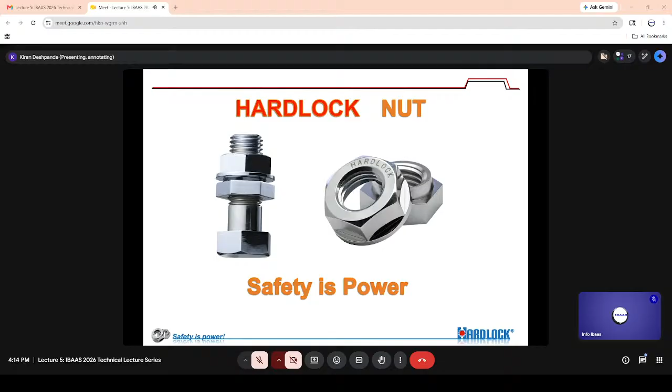HardLock nut is a very unique technology. It is patented and developed in Japan, and what they are offering to the industry is safety is the power. So with this first slide, I would like to run through a very small video, and this video will tell you everything about HardLock. Then we can go through various applications.

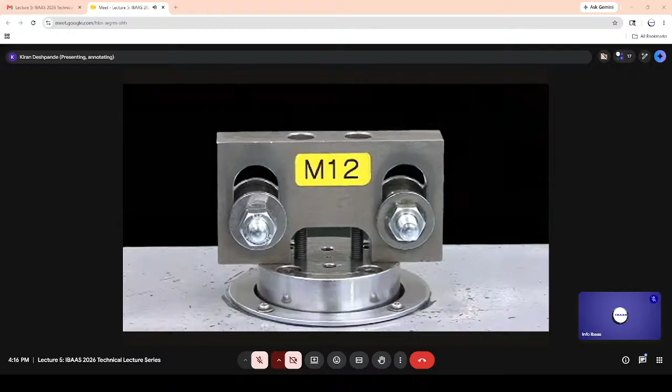Allow me to introduce you to the HardLock nut. Our powerful, original, self-locking nut keeps any application it is adopted in safe and secure all over the world. One of the world's fastest and safest high-speed trains, the Japanese bullet train Shinkansen, is supported by the powerful self-locking effect of the HardLock nut. The train and railway tracks are exposed to vibration and impact beyond imagination. The HardLock nut is the only self-locking nut which can withstand such severe vibration and impact. Now, let us see how the HardLock nut compares to other nuts in vibration tests. This test equipment generates extremely tough vibrations and impact in accordance with National Aerospace Standards NAS 3350 and 3354. The nuts are marked prior to testing.

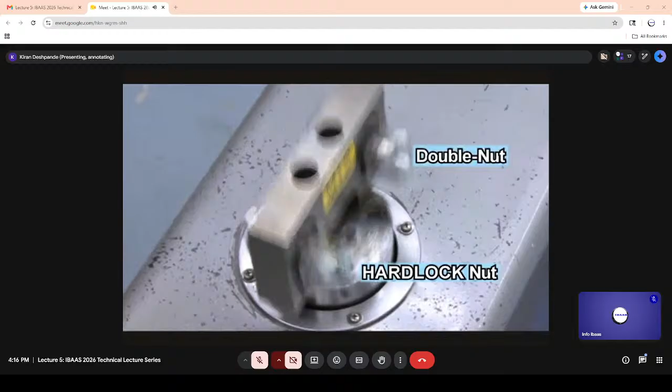By looking at the markings, you can see that the condition of the HardLock nut remains unchanged. These are the results of the vibration test.

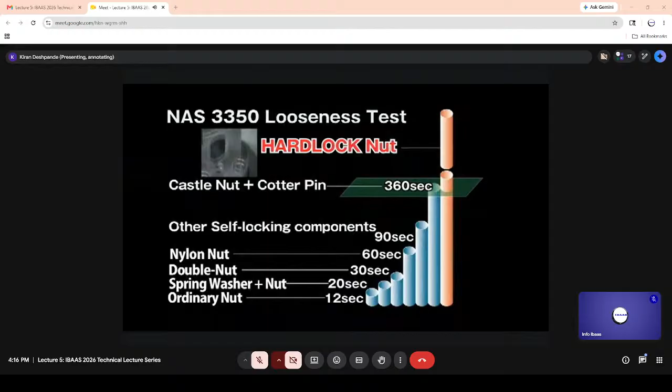The single nut flew off after 12 seconds, and the double nuts after 30. But the HardLock nut did not loosen at all, even after the maximum 30,000 test cycles and 17 minutes of vibration exposure.

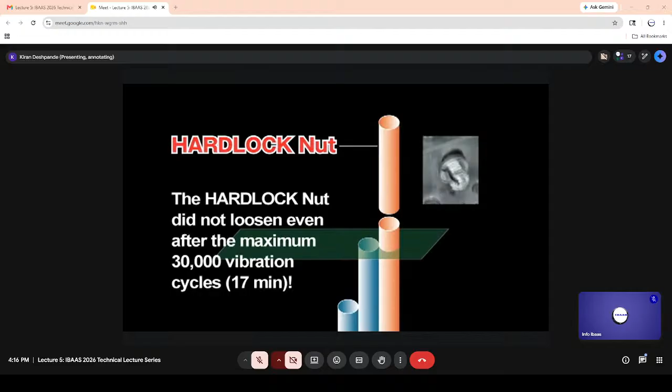This is a transverse Junker machine. It couples a bolt to a fixed plate and glider plate and moves the vibration plate transverse to the bolt shaft and measures any change in the clamp load.

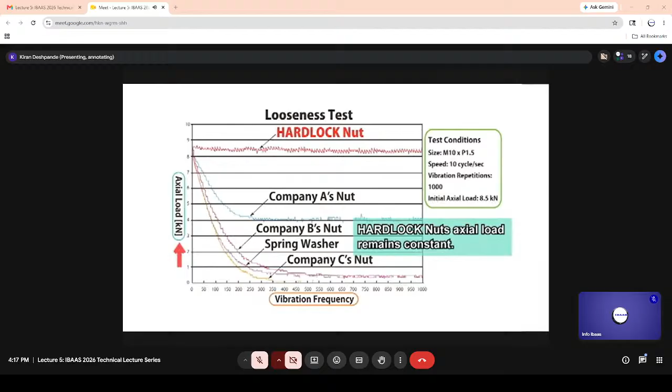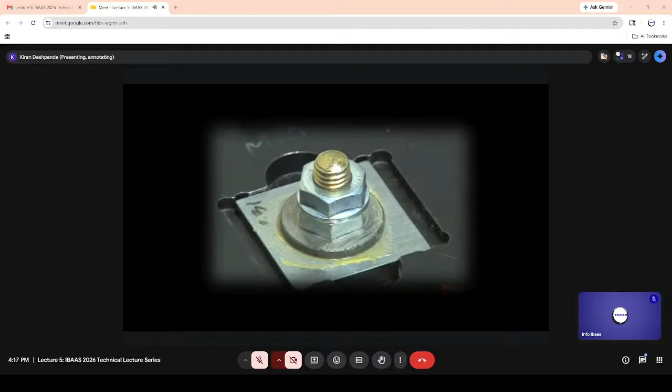These severe tests have proven that the HardLock nut can withstand vibrations and impacts not only in the axial direction, but also from the direction perpendicular to the axis. The latter direction is considered to be the predominant cause for loosening bolted joints.

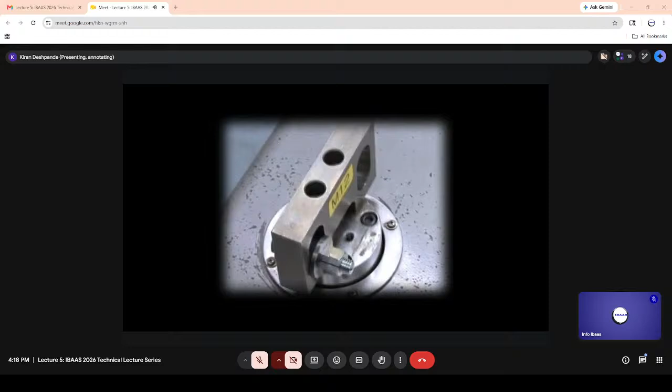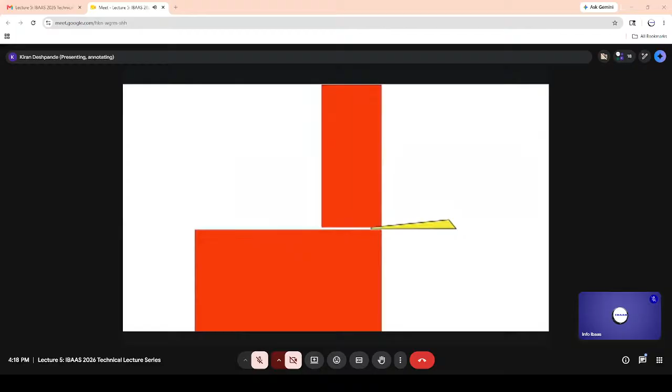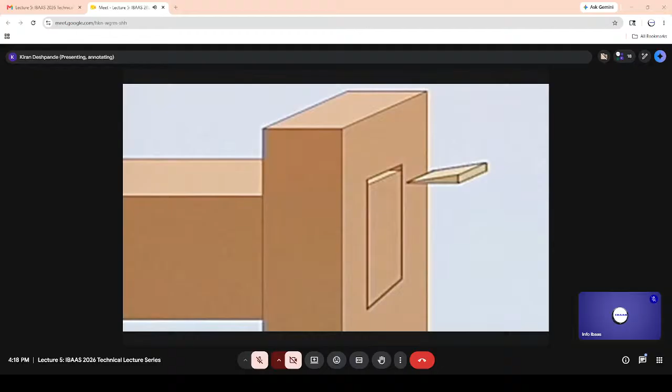The HardLock nut works by utilizing the wedge effect. Wedges are used in places like the torii arches of a Shinto shrine to firmly hold two pieces together. Hammering a wedge between the nut and bolt completely fastens the two. But this is hardly practical when you consider workability.

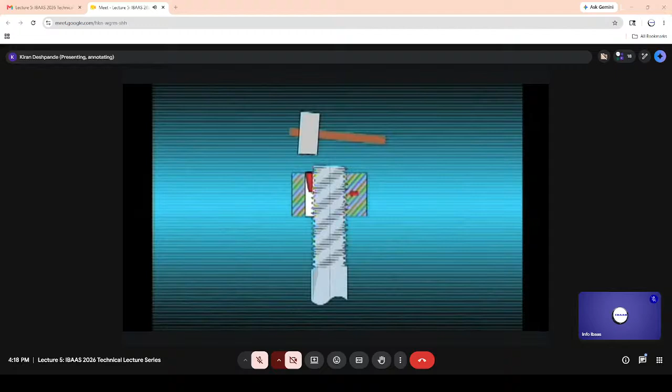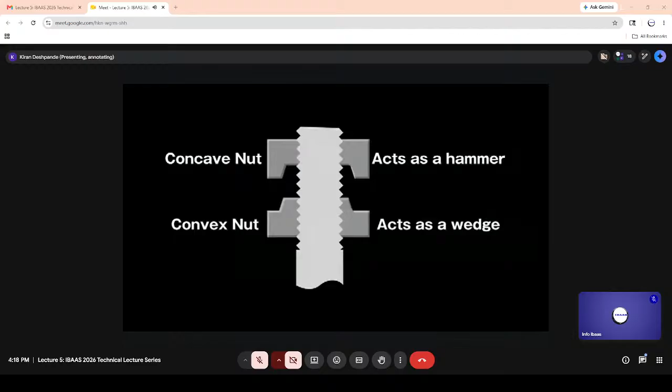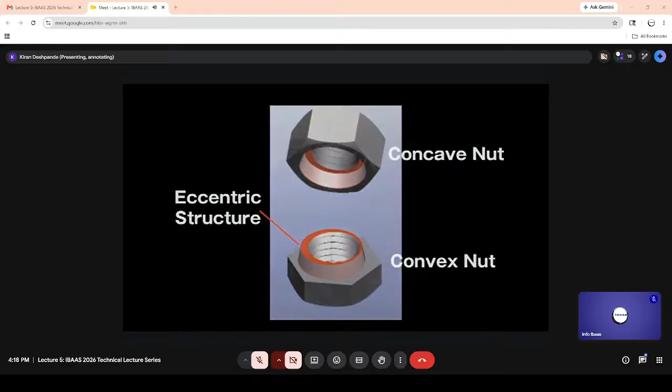So we divided the nut in two, whereby the convex nut acts as the wedge and the concave nut functions as the hammer. The convex nut is fabricated as a wedge by an eccentric structure that is slightly off-center. This wedge screws in between the concave nut and the bolt to produce a powerful anti-loosening effect. In other words, the convex nut acts like a wedge because it is off-center, and the concave nut functions like a hammer as it is screwed in.

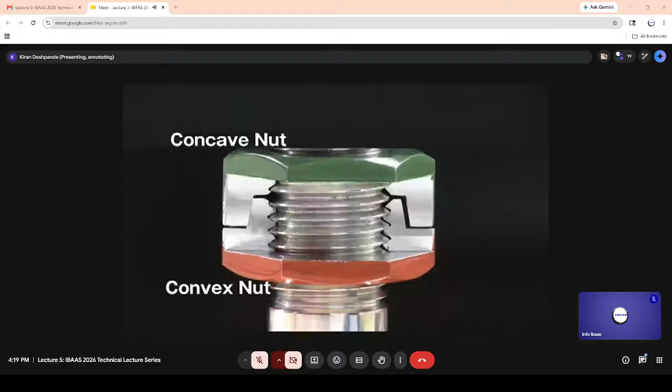The HardLock nut began garnering worldwide attention when a research paper was submitted to a gathering of the American Society of Mechanical Engineers held in Denver, Colorado in July 2005. The paper scientifically proved that the HardLock nut never loosens because of its structure.

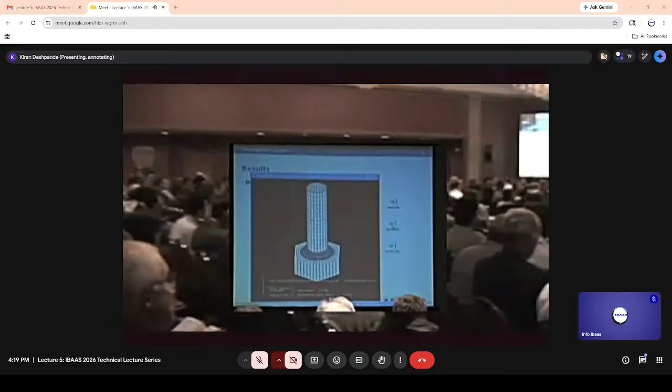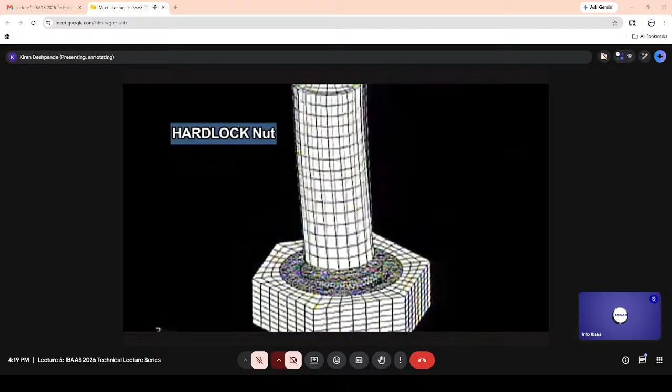When a strong impact is applied to a bolt shaft in the transverse direction, an ordinary nut slowly turns in reverse. This shows the nut loosening under vibrations. With the HardLock nut, though some movement to the left and right occurs, you can see that the nut does not turn in reverse. This is the secret behind the world's highest anti-loosening performance that keeps the nut from loosening under any kind of impact.

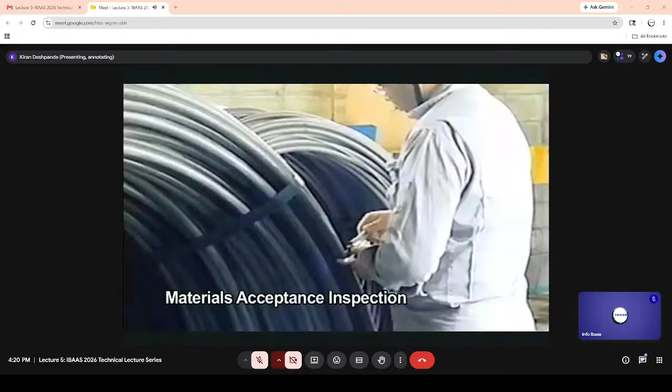The HardLock nut is often adopted in applications where loosening will cause a potential risk to both people and application. Therefore, we are particularly committed to quality control and frequently perform various quality inspections.

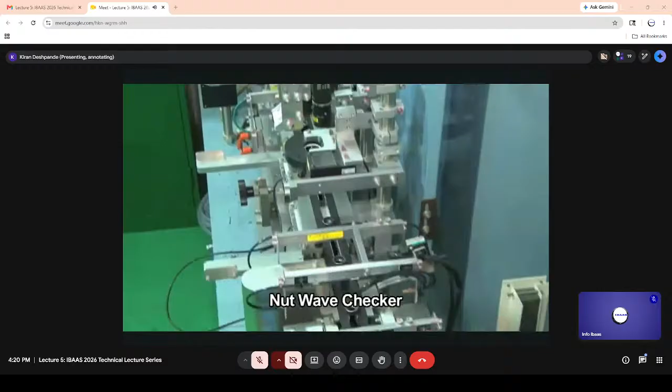This machine measures the dimensions of a nut in 6 places at the same time. This is a nut fastening tester, and this is a high-definition digital projector. Besides this equipment, a variety of inspections are repeated to ensure durability, workability, and fastening and removal.

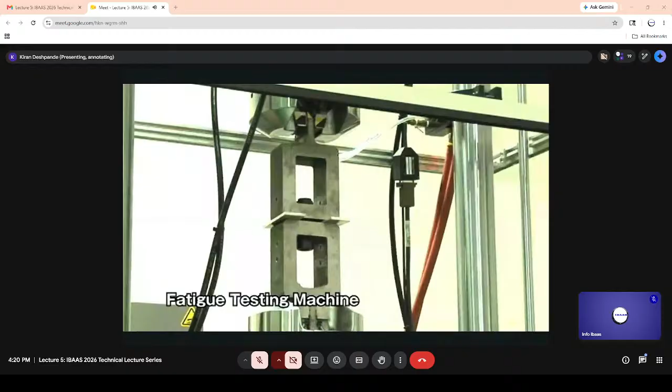Once the HardLock nut has been installed, it will not run loose, so performing frequent maintenance work is not necessary. Therefore, costs related to maintenance can be reduced immensely by utilizing the HardLock nut.

Let's take a look where the HardLock nut is utilized. First, the railway industry. The primary requirement of nuts used with railroads is that they never loosen. Loose nuts can lead to serious accidents.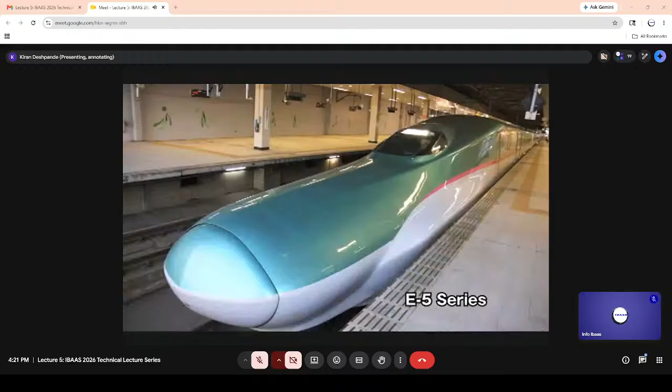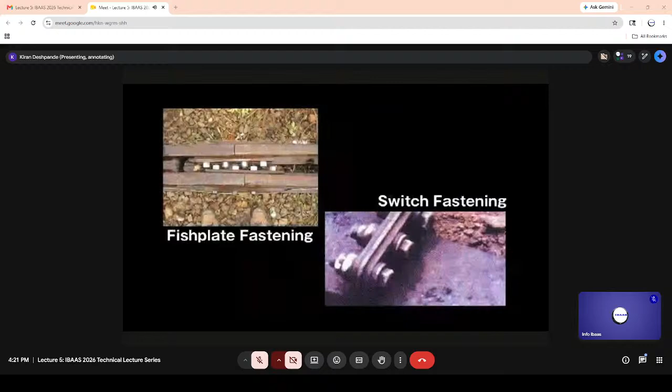In Japan, the HardLock nut is used at stations and inside walls and other locations of the famed Shinkansen and many other lines to ensure safety. In the UK, the HardLock nut has been officially adopted by Network Rail since 2003, replacing a majority of the fasteners for trains, tracks, switches and overhead wires, and at stations.

The HardLock nut has been adopted in the Taiwan High-Speed Rail. It was also officially approved by Queensland Rail of Australia and has been utilized in many locations.

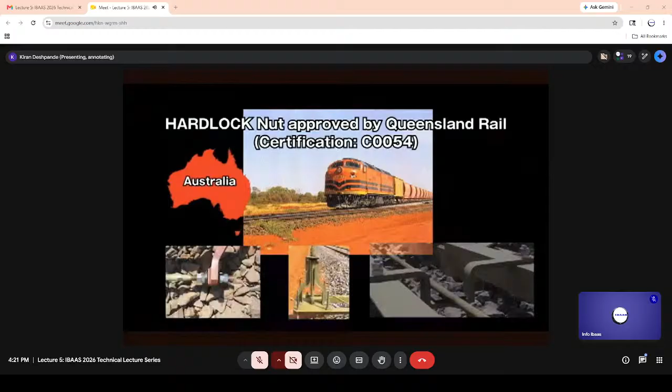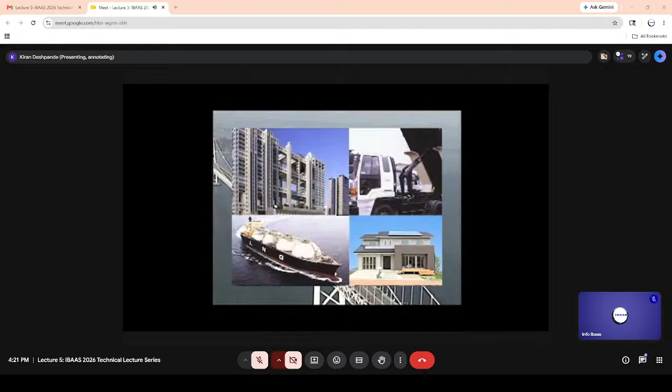Japan is a country with many earthquakes. If a bolted joint were to loosen, the consequences could be catastrophic. The HardLock nut is adopted in a wide variety of applications, both domestically and internationally, including highways and bridges, skyscrapers, huge facilities, power plants, steelworks, and earthquake-resistant homes.

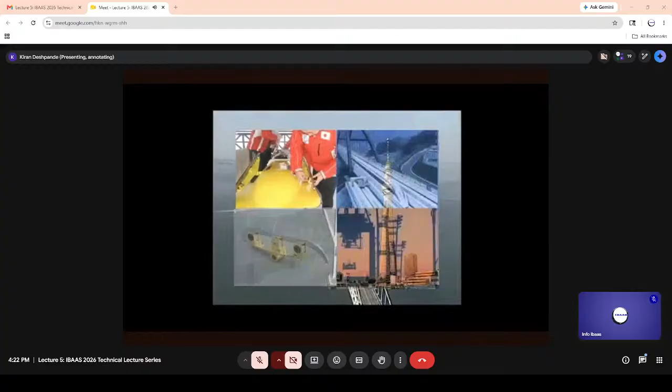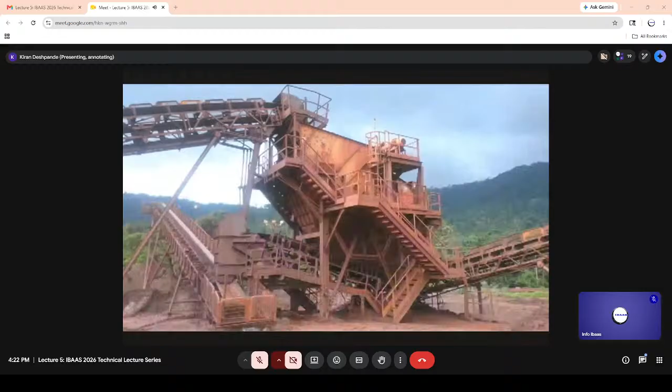Recently, the HardLock nut has been adopted by Vale SA in Brazil, the world's largest producer and seller of iron ore, in various heavy machinery and equipment, and has received an extraordinary evaluation for its remarkable loosening prevention performance, contributing to improvement in safety and extensive reduction in maintenance costs.

And finally, let me introduce you to the HardLock family. This is the HardLock rim. It has a stopper for tooling on the concave nut to improve workability.

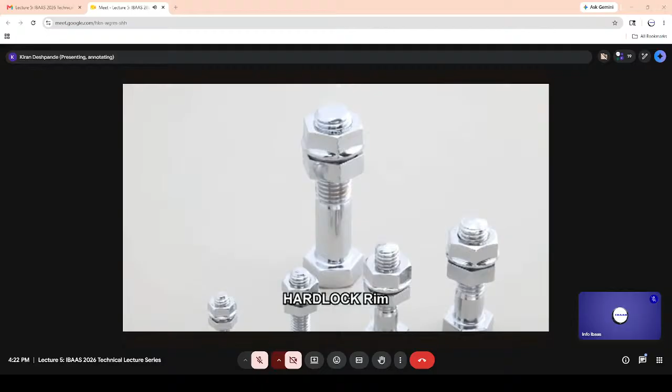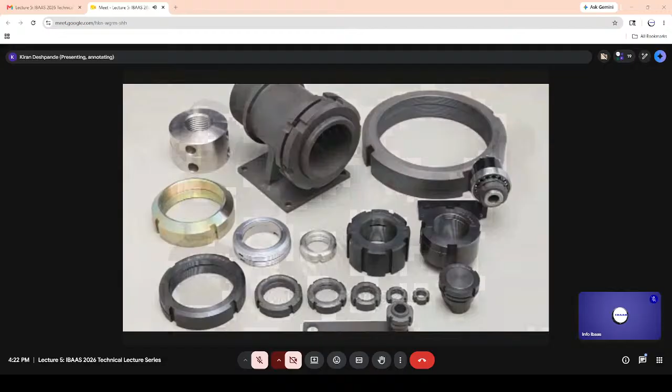This is the HardLock bearing nut. It is used in a wide range of industrial machinery to lock bearings and prevent loosening. This is the HardLock set screw, which revolutionized mold clamping in the automotive industry. HardLock industry always works towards improvement when developing new products.

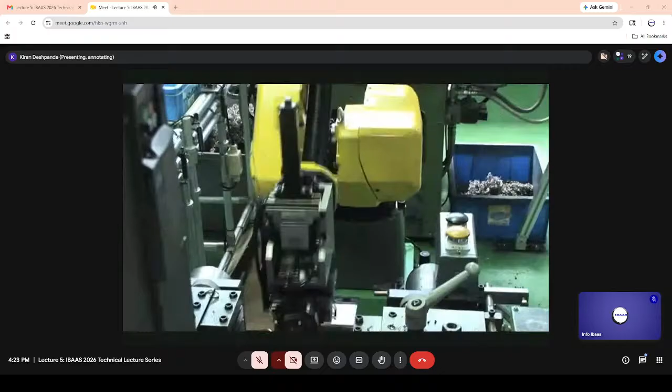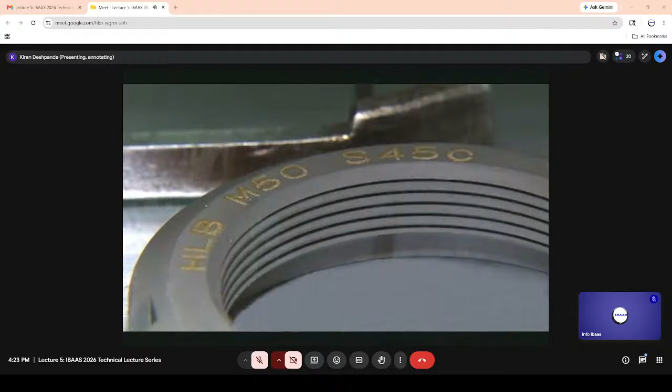What started in Japan has spread around the world. The products of HardLock industry are fast at work in places you do not see, within the foundations of society. Since our founding, everyone at HardLock industry, no matter what process they are involved with, has been forever passionate about safety in order to ensure world-class quality, making products that are guaranteed safe in any environment. Safety is power. Safety is HardLock.

So I have got help from Mr. Avadut for preparing these slides. This slide speaks about Mr. Wakabayashi. Driven by the desire to create truly reliable locking solutions, Mr. Wakabayashi founded HardLock industry over 50 years ago after identifying flaws in existing locking designs.

This concept was inspired by the traditional Japanese torii, a symbolic structure seen at Japanese shrines.

As explained in the video, the nut is divided into two parts: the convex and the concave. The convex nut has an eccentric protrusion, and the concave part has a concentric recess. When you tighten both nuts together, the concave part acts like a hammer, and it's like a wedging technology. The eccentric protrusion acts like a wedge. This creates a very high level of friction, and a very high level of locking power, which is very unique in the world.

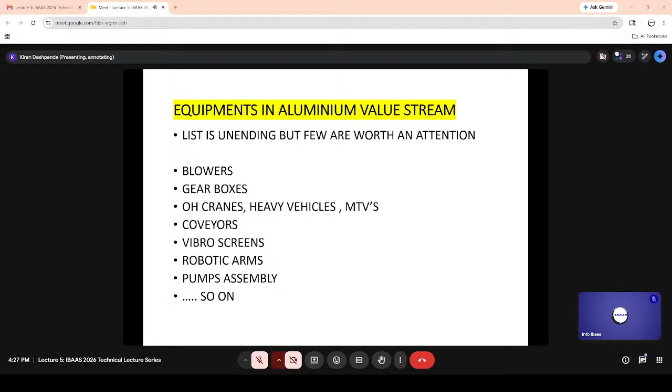Mr. Avadut Desai gave me some applications in different industries. In food and beverage applications, it is used in this particular application: an M24 HardLock nut used on the cone valve of an IBC tank handling powders and granules, ensuring secure fastening and preventing loosening during operations.

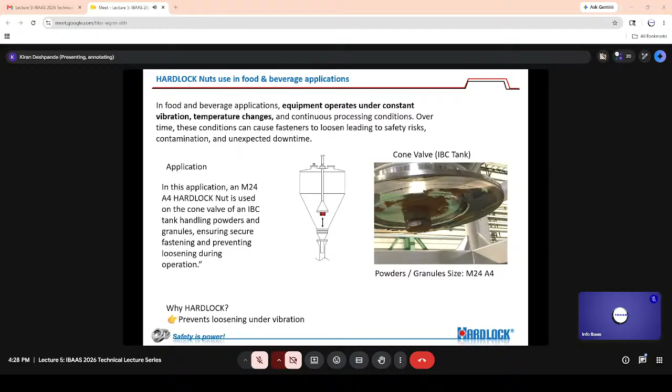In wine production tanks, HardLock nuts are used in multiple areas such as handrails, internal filters, and conveyor systems to ensure fastening where welding is not possible and to prevent loosening caused by vibration and continuous operation. Why HardLock nuts? Because the tank wall is too thin for welding, so bolted fastening is required, and HardLock ensures the joint remains secured without loosening.

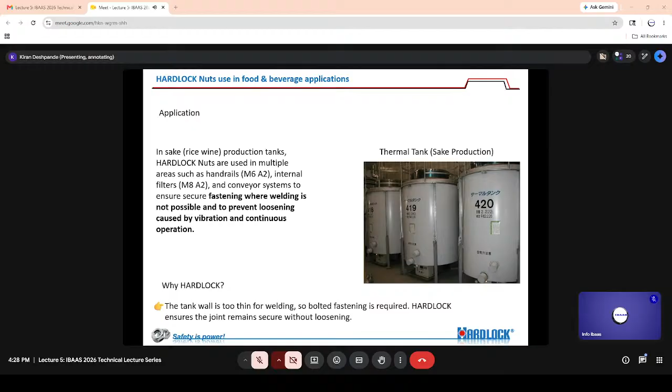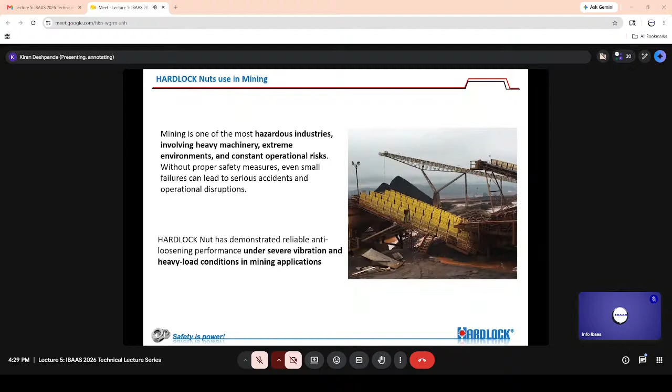In the mining industries, mining is one of the most hazardous industries, involving heavy machinery, extreme environments, and constant operational risk. Without proper safety measures, even a small failure can lead to serious accidents and operational disruption. HardLock nuts have demonstrated reliable anti-loosening performance under severe vibrations and heavy load conditions in mining applications. These are some photographs where you can see these HardLock nuts preventing the loosening of the surfaces.

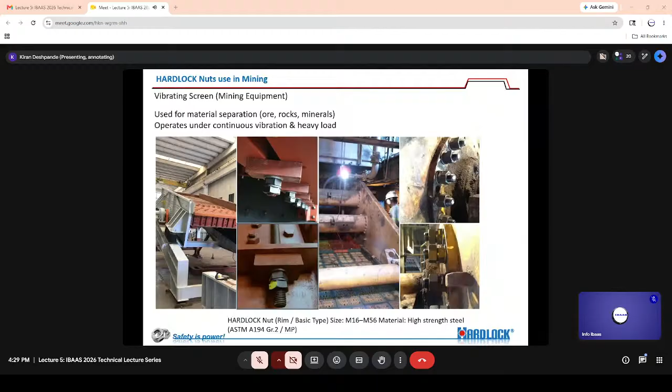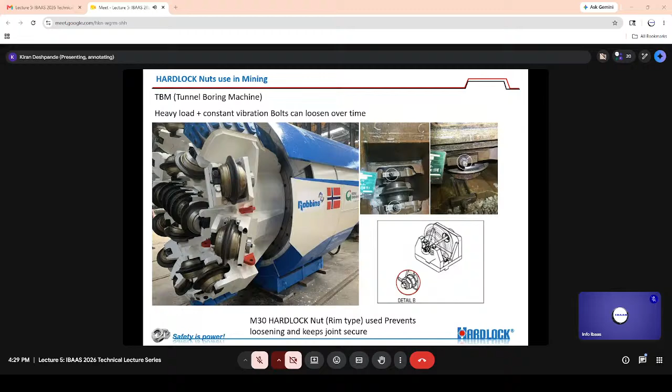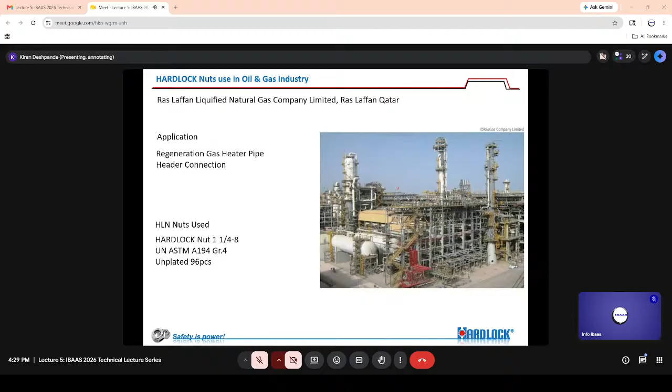To prevent this, HardLock nuts is a most remarkably adaptable solution, and it is most reliable. There is no comparison to HardLock nut.

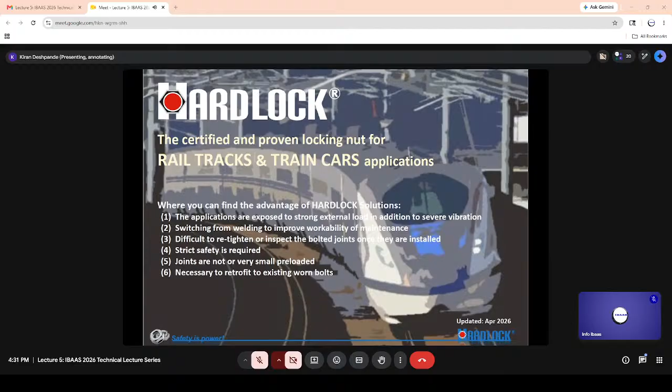Now these locking nuts are all maintenance free. You can unlock and again put it into the locking position. You never have to go again and again and check the tightening, because once you lock the nut, it will remain as it is.

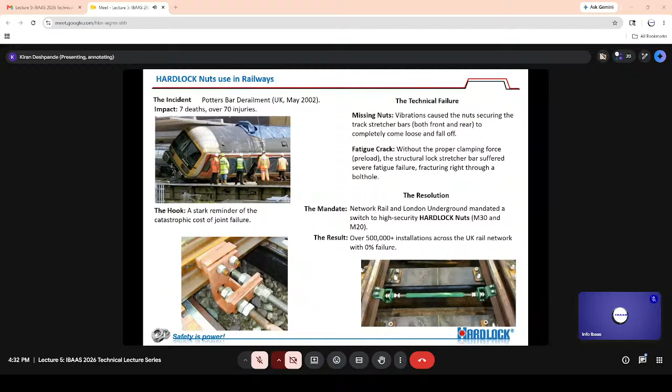So this presentation today is that this particular concept can be taken to the aluminum industry. That's why currently, through my friends in India, we are explaining this concept to Hindalco, and they are likely to adopt HardLock nuts at various applications.

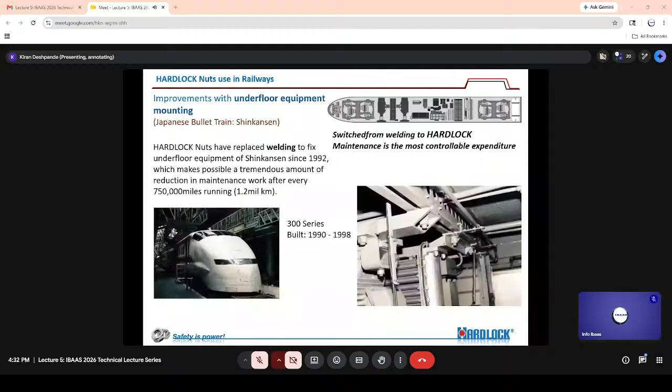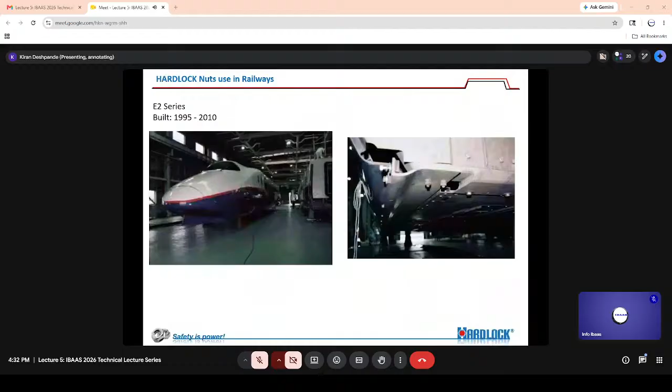So these photographs show the various applications of HardLock nut providing safety, and many of the applications all over the world have realized that this is going to be the ultimate solution.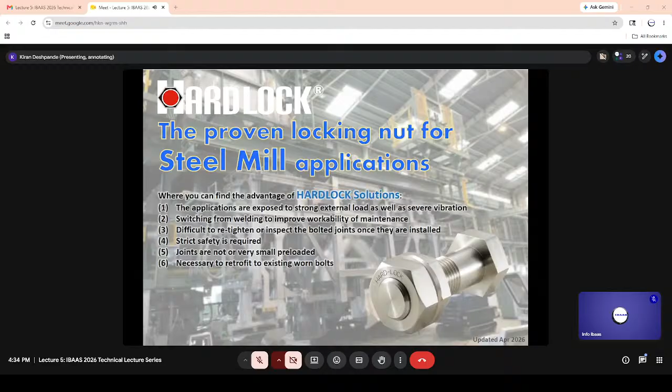So these are the various applications of steel in the steel industry, coking and sintering plant. It is fender, unloader, bucket, rail track, stackers, hopper liners, chain conveyors, coking plants, backstay bolt, guide car, insulation shield, sintering plants, hopper liners, conveyor skirts, moving gate, sprocket wheels, pallet cars. So everywhere.

So these are similar applications in the aluminum industry where you can think of replacing your ordinary locking nuts with HardLock nuts, because in the world, all these comparative studies have confirmed that this is the only ultimate solution.

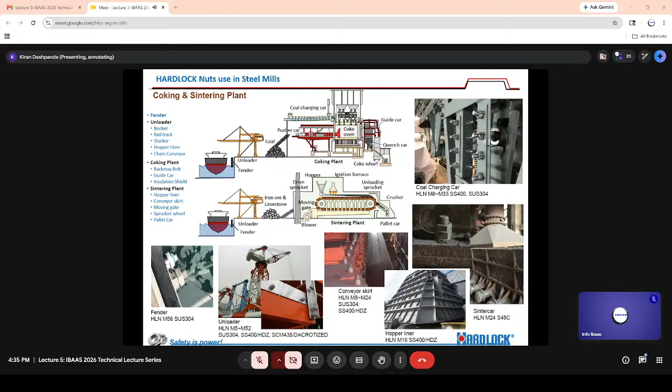Iron making, steel making: blast furnaces, stove gas cutoff equipment, stove valve flange bolts, tuyere branch heat resist bolt, blowers, molten iron transport, fish plate bolts, and rail track turnbuckles. So these are various applications. Fish plates and blowers are very common phenomena.

In aluminum industry, we also have the rail connections for transferring alumina from refining to the smelter position, as well as blowers everywhere in furnaces, in pot rooms, and these are likely to get loose and create problems. To prevent this loosening effect, HardLock nut is one of the ultimate solutions.

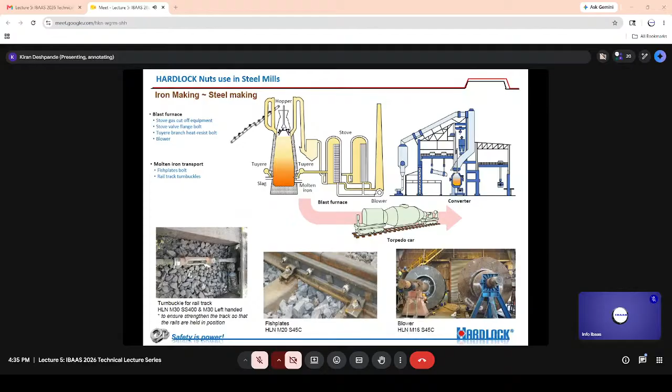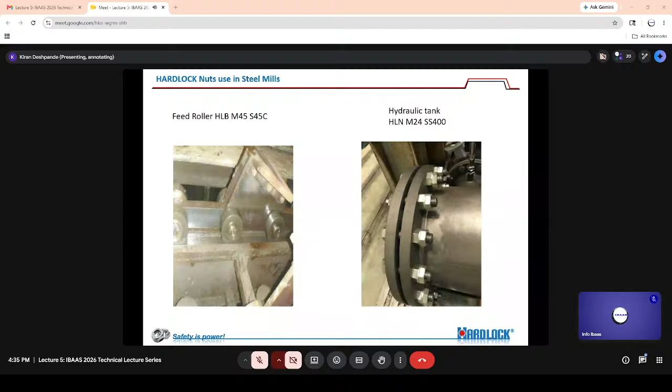So these are roll lifters, hydraulic tanks, feed roller. These are HardLock bearing nuts to lock the bearings. HardLock nuts used in aluminum industry.

Heavy machinery and constant vibrations are high risk operating environments, high temperature process and thermal cycling, complex operation across smelting, refining and castings. So the hidden risk is fasteners loosening.

Bolted joints are critical but vulnerable connection points. Vibration leads to loss of preload. Thermal cycling can cause 50 to 60% preload loss in real conditions. So it has an impact on safety and reliability. Reduced preload gives reduced joint integrity, leading to component separation, breakdowns, and catastrophic failure.

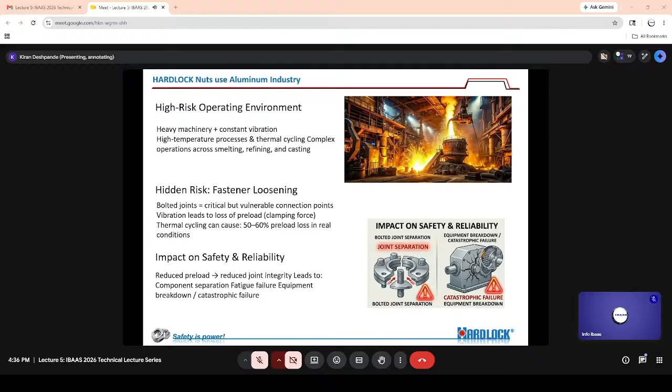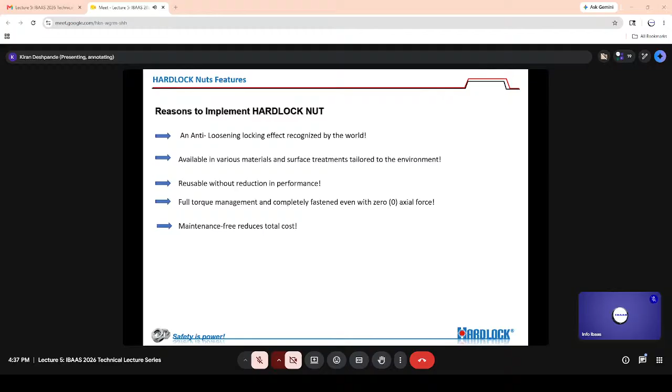Reasons to implement hard locks are anti-loosening locking effect, recognized all over the world by many countries, available in various materials and surface treatments tailored to the environment, reusable without reduction in performance, full torque management, and completely fastens even with zero axial force.

It's maintenance-free, reducing total maintenance cost. So safety is power. That's all from my side. This was my small presentation, and I hope it was meaningful.

Now, if we move through the entire value chain, at every stage there are going to be surface joints and vibrations. So this locking nut is the best solution everywhere. Hindalco has realized this, and we are going to go ahead with Hindalco in coming days. That can give a good case study to apply everywhere.

This was the end of my presentation, but my important point here is that in the aluminum industry, safety cannot be neglected. One way to contribute to safety is keeping your surfaces together with proper bolting, and using hard lock nuts to keep your bearings safe. This is a proven technology in Japan, used in nothing less than bullet trains. This is the ultimate safety solution which hard lock nut is ready to offer.

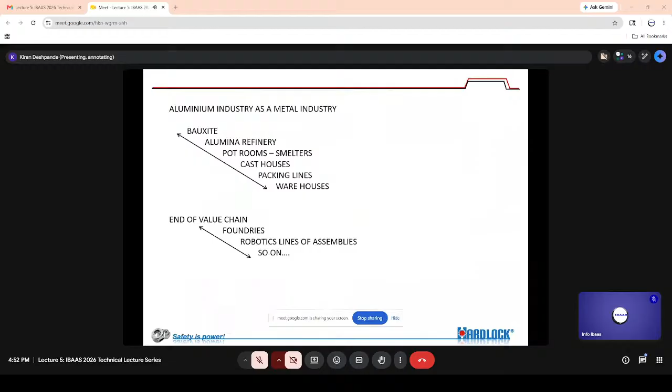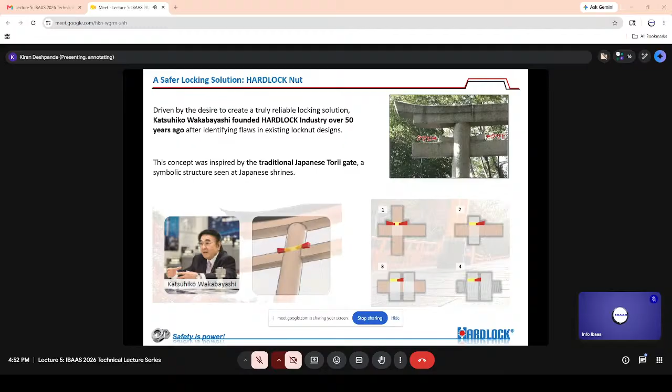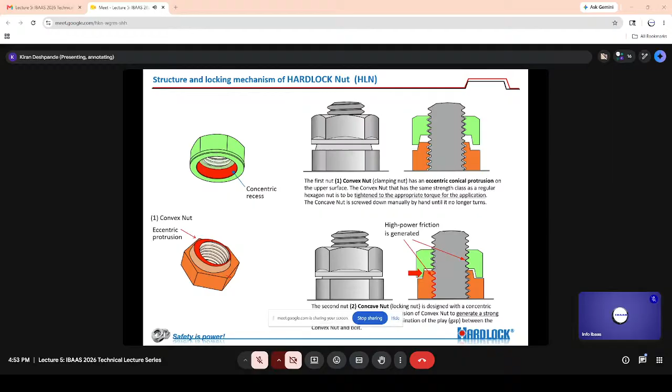Swagelok uses a ferrule technology. Before that, not after. Locking mechanism of HARDLOCK - is this the one you are talking about, Avdut? Kiran sir, the next slide after this one. Yes, importance of proper axial force. Correct, okay. So you're able to see this slide? I see it.

So the main purpose of any locking nut is to keep two parts or two things clamped together - keeping the two surfaces together using prevailing torque. If there's a gap created between two surfaces, the bolt is the one that takes the load. If there's no space, the load is distributed evenly. So what happens in regular nuts is the preload is easily lost, and the main point of regular nuts is they use preload as their mechanism. If the preload is lost, then the parts come off and accidents occur.

But HARDLOCK Nut is a mechanical locking solution. So even in low preload or no preload at all, zero preload, there is a possibility of loosening, or not loosening but a gap could form between them, but the clamped products won't come out. That is one of the main strong points about hard lock nuts. So the preload control is possible with hard lock nuts - that is one of the strongest points.

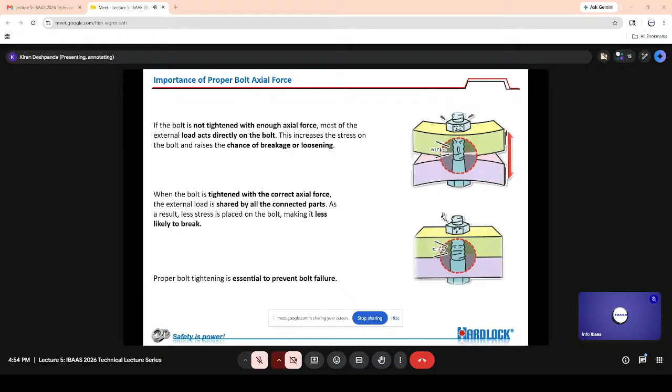About 25 years ago, I was brought in by Swagelok as a consultant to look at their business model. Their unique proposition was they use ferrules to clamp down when they would make a connection.

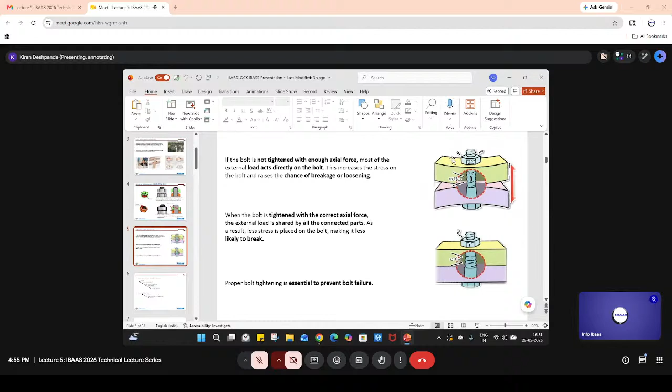So you guys, to me, almost look like you're using shims - like when you hang a door, the door jamb, there's a little gap, and you put a little shim that takes up the extra space. Yes, we use the wedge system.

The HARDLOCK Nut is divided into two nuts, a lower nut and an upper nut. The lower nut is a convex nut and the upper nut is a concave nut. The lower nut has a protrusion over it, so one side is quite thick and the other side is thin. In comparison, the concave nut has an internal recess within it.

So what we recommend is when you tighten the lower nut, you tighten it according to regular nut standards, which creates the initial preload that is necessary to keep the parts clamped together. Then we recommend that when you tighten the concave nut, the upper nut, you tighten it according to HARDLOCK standard torquing values. When you do that, the internal recess of the concave nut pushes the wedge, the protrusion, inside, and at the same time the other side of the bolt resists it, creating an opposing force.

So, as opposed to using a ferrule to oppose a force, the opposing force is what creates the locking effect. Even in heavy vibrations or low preload situations, HARDLOCK Nut stays strong.

So you use that technology more than you would use a ferrule? I know Swagelok uses ferrules. Yeah, we do not use this kind of locking nut system.